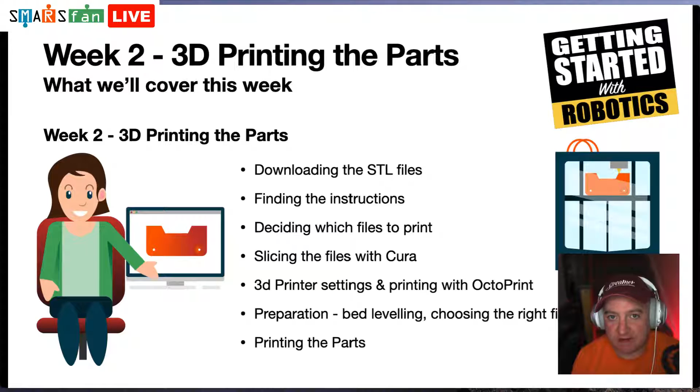So this week, as I said, we're looking at building, printing out the parts. We'll be downloading the STL files, finding the instructions. We'll be deciding which files to print, because there's a couple of different types of robot we can print. We'll be slicing the files with Cura. We'll be 3D printing, looking at 3D printer settings and how to use Octoprint, which is a really great add-on for a 3D printer if you're not already using that. We'll also be looking at preparation, how to level the bed, choosing the right filament colour and so on, and then printing the parts. So, downloading the STL files.

Okay, let's get back to our keynote. So first of all, to download the correct files, there's a couple of different places we can do this for the SMARS robot. So the original place where SMARS was hosted was on Thingiverse.

So if we switch over to Thingiverse, let's get Thingiverse open. And let's have a quick search for SMARS and see how easy it is to find. So we'll literally just type in SMARS, and the first one that comes up is SMARS, a modular robot. That's the one that we're after. So let's click on that and have a see what we have.

So you can see there, that's Kevin Thomas's alter ego on Thingiverse, and you can see there November 22nd. I think we should mark that as a birthday, what do you think? 2017. And there's been quite a few different comments on that, a load of remixes. People have loved this robot because it's so flexible, so adaptable, very easy to build, not very complex shape-wise, or to be able to add things to it. So this is why it's so popular.

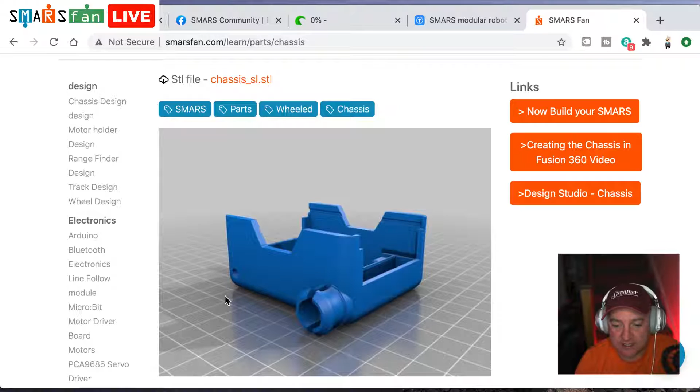We can just go to build instructions, click on the wheeled robot, and see the list of all the different parts that we might need. If you click on the chassis, for example, it'll take you to a page all about the chassis. You can download the file there, chassis SL.stl, and read a little bit about it. You can see in context all the other things that relate to it, some quick links, and a video about how to create this in Fusion 360 if you wanted to expand it. So a great resource there that we put together.

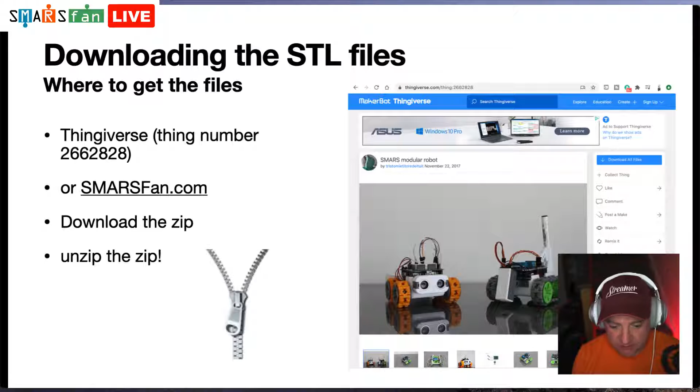There's a couple of different ways that we can get information about the right files. I don't care which you do, as long as you get hold of the STL files, that's the important thing. You might want to go to the source, go to Thingiverse and get them there, or you might want to look at SMARSFan. Whichever you want, download the files, unzip them, and that's the first part done. So then the build instructions.

Okay, so build instructions. As you saw a couple of seconds ago on the SMARSFan website, I put together some quite detailed build instructions step by step. We just go back to the home page again, click on Learn, click on Build Instructions, and then click the Wheeled Robot button. There is instructions for the quad robot as well if you wanted to do that, but today, in this series, we're going to be looking at the Wheeled Robot.

So you can see there we've got some step-by-step instructions. There's a little navigation bar on the right hand side, and some nice pictures on the left with instructions about what we need to do. We can click through them one thing at a time, and see all the information that we need to get started with that. You can see the robot being built up there with all the different parts. So that's, I would say, the most authoritative place to get the information from.

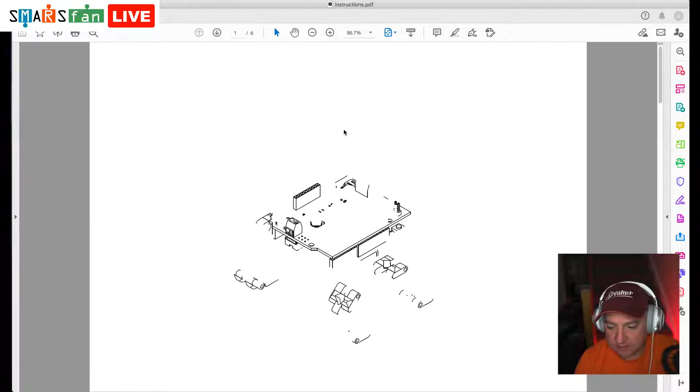There are some files in the files folder when you downloaded them earlier. So let's have a look on here. There's some PDF files, so there's an instructions PDF. We open up that, let's have a look there. There's some instructions, it's a bit like an IKEA kind of instruction manual about how to assemble this. You can see there, it's very simple to put together.

One of the things that people get confused with is this step number 10 that you can see here. They ask, where'd you get that pin from? I didn't see an STL file for that little pin. All that pin is, I'll just come back to the main screen, I've got some filament here from my 3D printer. It's literally just taking that filament, snipping that off and putting that through the track. That's all that is, so it's not that you're missing a part. Okay, let's get back over to Keynote.

So that's our instructions. Let me just bring up that on the screen there so I can see what I'm doing. I'm managing lots of different screens here at the moment. So build instructions is one place that you can go, and you can also look at the PDF file that's part of the downloads.

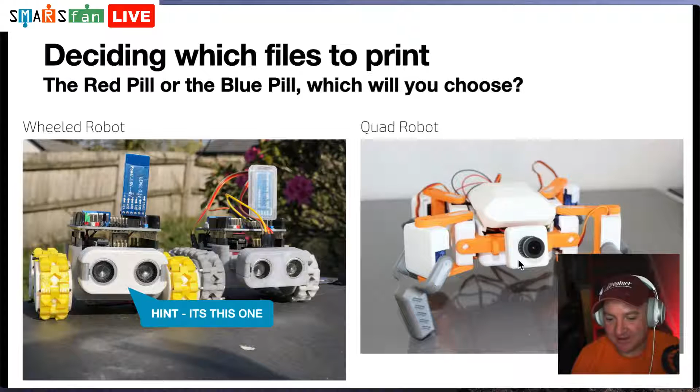So, deciding which to print. Are you going to go for the quad, which is a bit more of a complicated build? I've got one on my desk here. Or are you going to go for the standard wheeled one? This video series is really about the wheeled SMARS, so that's why I've said it's this one. That's really what we need to go with. So let's choose that one, shall we, together?

Now, slicing with Cura. Okay, so Cura is the software, certainly that I've chosen to use to slice the files.

There is other software available. There's Slic3r, there is Simplify 3D, which I also purchased as well. That's commercial software, about £100, I think, to purchase for a perpetual license. I believe they announced this week that they're working on version 5. The announcement seemed to be all about infrastructure though, so I'm not sure what new features it brings. Really, that's what people are interested in, not really the background stuff. I believe it's like a mother and son who run the company as well, so it's very good software.

It's very advanced structures, which we'll get onto shortly, about how it can help support you when you're building your model, the different internal structures that could be temporarily printed to stop the print collapsing in on itself. But Cura is free. It's provided by Ultimaker, one of the largest 3D printer manufacturers, and they provide the software for free. It's completely open source, very easy to get started with, but also very flexible. There's a whole load of features you can get into and make some very interesting prints, so we'll talk about that a bit further on.

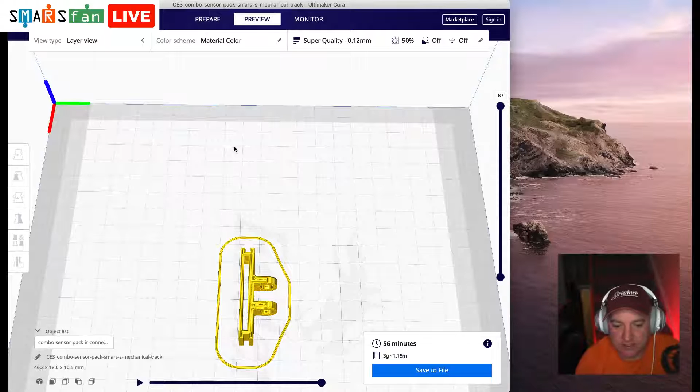So I've got Cura loaded here, and you can see at the top here, there's 3 different buttons: prepare, preview, and monitor. Now, I don't use the monitor myself. That's for connecting to your 3D printer and monitoring the progress, where it's up to. I use Octoprint for that, and we will come to that momentarily.

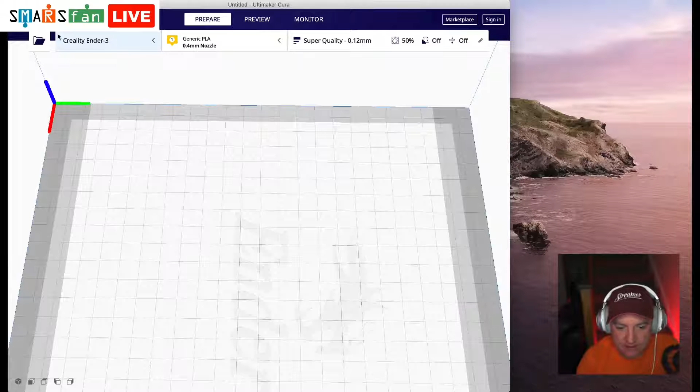So preparing, let me just get rid of this part that's on the bed. Let's open up some of them STL files that we downloaded earlier. So you can see here, these are the files that we downloaded.

So there's an ultrasonic. If you press space on a Mac, you can actually get a bit of a preview of what that file looks like. So that's... where's it gone? That's this part here, which is the ultrasonic holder.

So let's say we want to print that part. So I'm going to open up that one. That's going to load it onto the bed.

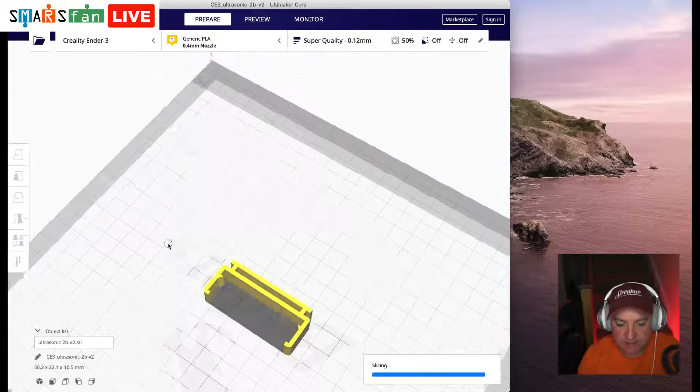So this thing I can see in front of me here, I can move it around, is a sort of virtual 3D printer. So you can see there, that's what it looks like. And right in the middle of the bed is our part. And we can see on the left-hand side there, it says object list.

So you can see on the right-hand side, it's given us an estimate. Based on the current settings, this will take 58 minutes to print. It'll use 4 grams worth of filament, and we're on super quality, so the layers are 0.12 millimeters in height. That's pretty dialed in, that's pretty extreme.

So if we go to the quality settings and change that to low quality, let's keep our changes there and see what happens now. On the lowest quality, it can do it in 26 minutes, so it's half the time, but the quality will be significantly different.

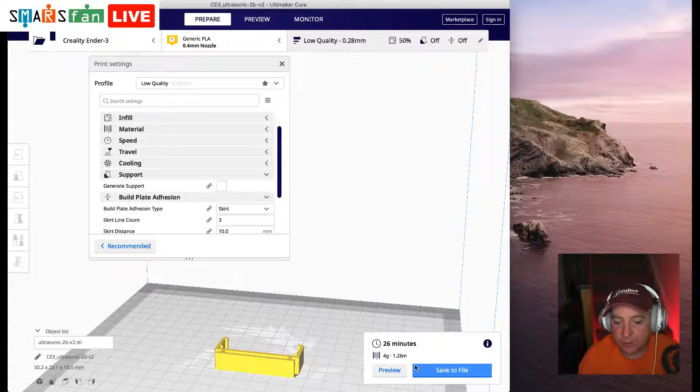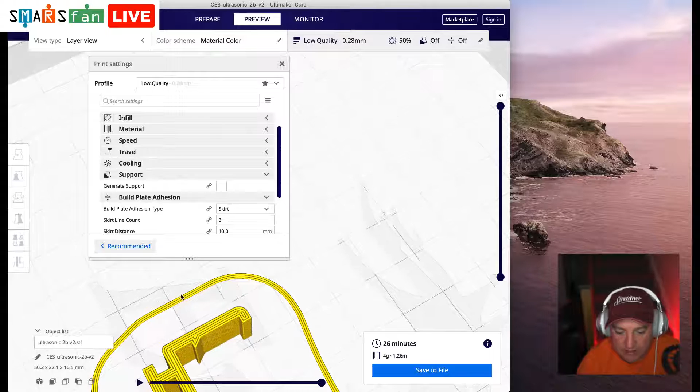So if we go to the preview button here and have a quick look, I just try and get a good view on this, it's not the best to be able to navigate. You can see there, these lines, these are the actual paths of the filament as it will be laid down. So it will do this outline, it calls that a skirt, and we'll come to support and build adhesion in a moment.

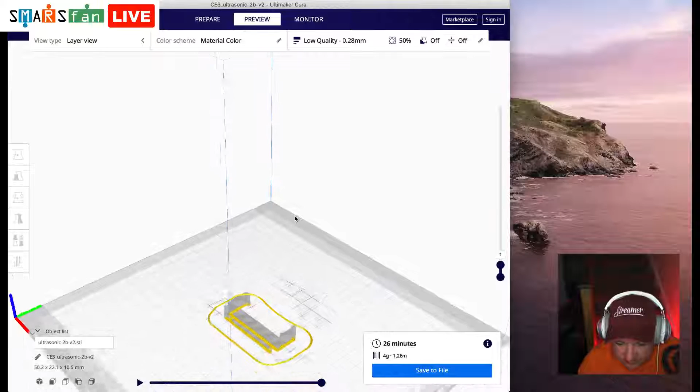So you can see that, and if we move this here, this is the sort of layers themselves. So if we go down to the very first layer, this is what the 3D printer will do. If I just get rid of that for a second and try and zoom out, let's see if I can get it to do this. So there we go, what we can do is we can pretend to be the printer, and you can see the head there moving around.

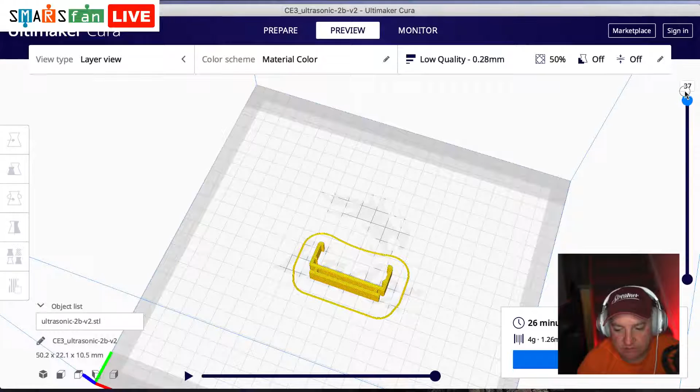If I move this like this, it might be a better view of the screen. So let's see if I can get this displayed a bit better. So this playhead here, this thing is the 3D printer's nozzle, and we can see it's going to draw this path out around. It'll do it 3 times, and then it'll start to go to the middle, start to draw out a bit at a time, and it'll do that for each of the layers. So we can see here, if we build up the layers, there is 37 layers in total.

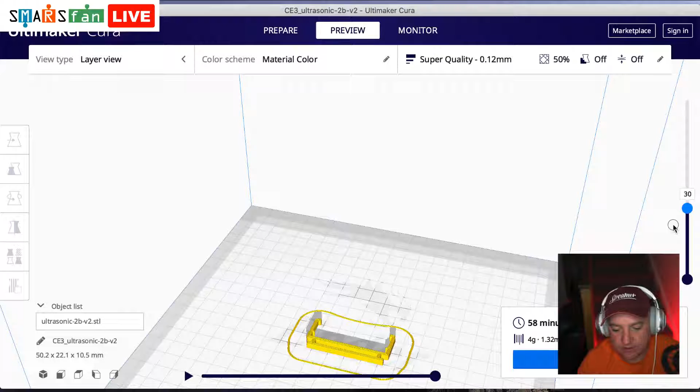If we change that quality though to be super quality instead, let's keep that change there again. It's now doing its slicing, and we can look now to see how many layers there are. So 37 before, there's now almost treble the number of layers, 87 layers now. So they're much more refined, and that means the quality of the print will be so much better. The curves will be rounder, the walls will seem smoother, all round it'll just be a better quality print, but it does take a lot longer to do that.

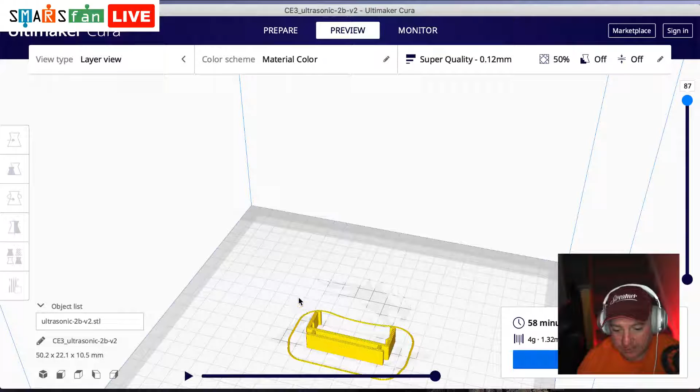So that is how we load objects in there. So if we were to load another object, if we come back to the prepare screen and click on that little folder again to drag in some extra ones. So say we want to do it at the same time as that, the motor holders. Let's try, yeah, the holding board 9 volt, they come as a pair there. So it's just stuck it there.

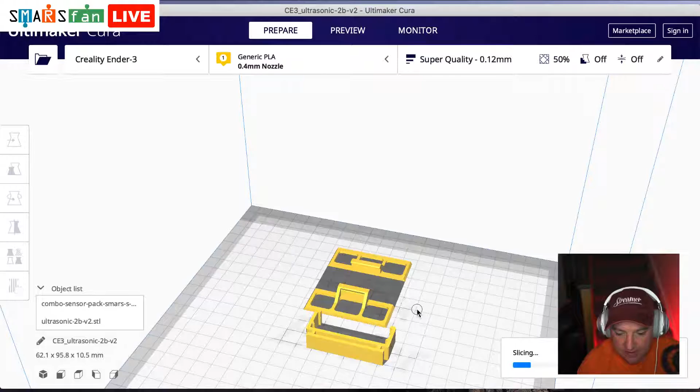I'm not too happy with that. You can click on the actual part and sort of move it about a bit, so we can do that. We can move them across as well, let's just do that, grab that green thing. I like them to be as close to the middle of the bed as possible, but I don't want them to be too close together, just so that they're not touching. There we go, so it's going to redo its calculation to see how long it will take to print.

And it thinks now it's 1 hour and 57 minutes, so you can see our print time is increasing. Now I don't know where you have your 3D printer, if you do actually have a 3D printer, but I have mine in my living room, so I have to try and keep my prints down to a minimum time as possible, rather than have really long prints.

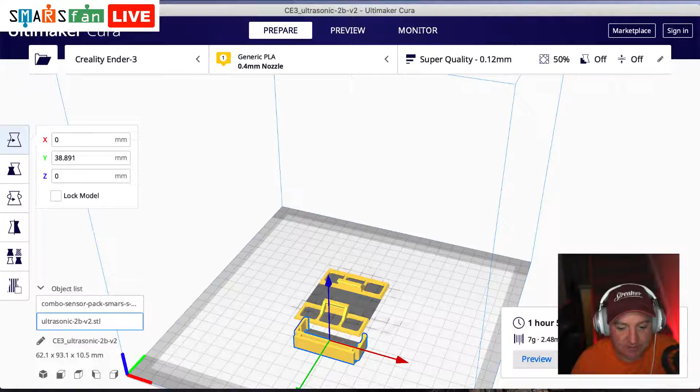So the chassis, that was an 8-hour one. I had to get up early to start that one off, so that in the evening it wasn't still carrying on printing, because it makes a bit of a sound. I have ordered some quieter fans, and they're coming in the post this week, but we'll switch on the printer in a minute, it's just next to me, and we can see if you can hear it actually on the microphone. Anyway, so that's on the prepare.

Now what's interesting on this one, if we zoom into these little pieces here, oops, they have an overhang. Just trying to get it into view, I'm not sure how to make it rise up.

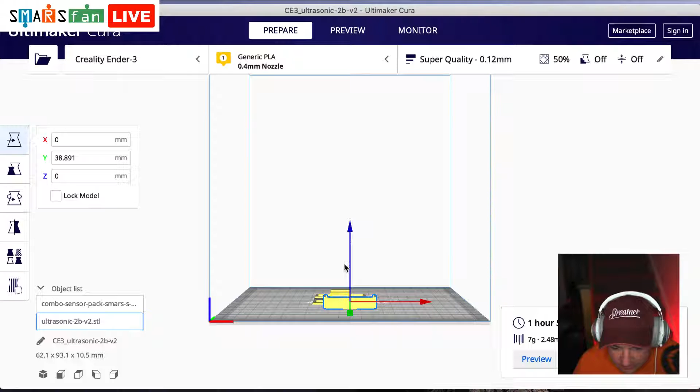If I do, there we go, that might be a better view. So if you look there, these parts overhang slightly. So when I go to preview, if I've selected support structures, then it will actually put something underneath that to stop it from falling in on itself if it's within a certain tolerance.

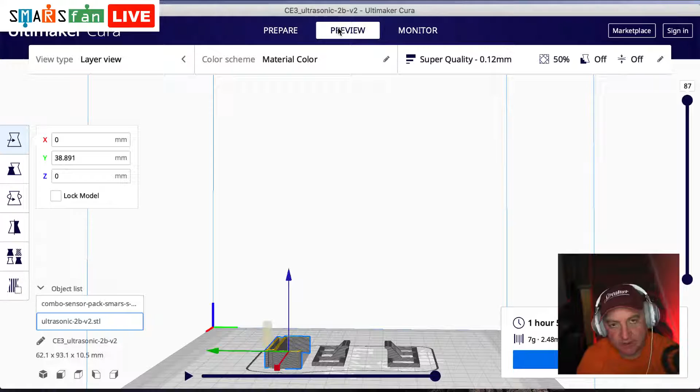Now they have been designed to be 45 degrees or less, the curvature. So as the printer's building up, it can actually step out a little bit, a bit like dominoes. It can sort of just overlap them ever so slightly. And as long as that angle is 45, 50 degrees, something like that, it's fine, it won't collapse in on itself. But if you try and print just into thin air, obviously the printer can't do that. The filament will just loop, it'll just sag down. So you need some kind of support structure underneath, and you need to print that from the bed.

So there's a setting in here which is called support, and you can do lots of different types of support. So we actually didn't have that switched on. If I switch that on, let's see what happens now. See if that actually does put some support in there. It might decide that it is going to do that.

And there are different options for support. So I like the tree option. Rather than just creating like this has done now, just like a straight up and down structure, you can create one which is almost like a tree. It has like a main trunk and little branches that come out. So one of the compromises with doing structures is you don't want them to adhere to the bed, to the structure itself.

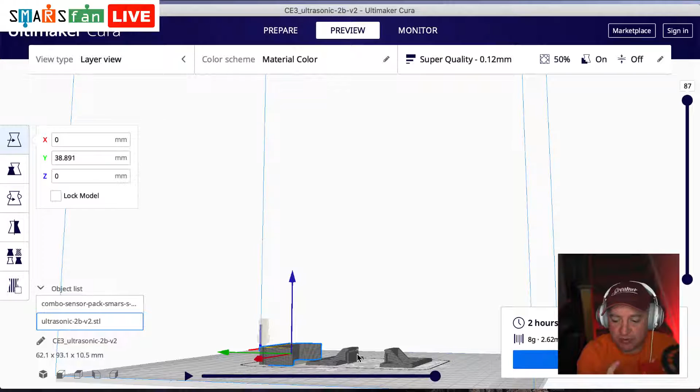You don't want the structure to adhere to the print itself. So when I printed out this one, and we'll have a look in a moment at, my lighting's just changed. Let me just change that back. Yes, when you print out something like this chassis, and I've got a video of that later on that we can see, there are some things in there that required support structures.

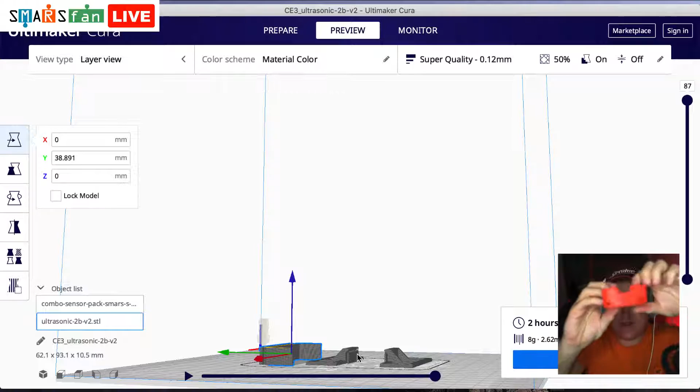So, for example, that circle there, the angle in there requires a bit of structure, and also underneath on the bottom, in fact, there is still some support structure fastened on there, and that's one of the things we have to watch out for, and why I prefer the tree one, because the tree can have a much bigger trunk structure, but then little branches to hold up the bit, and when the thing comes across the very top, it's hardly touching it. It means you can remove it a lot easier, and that's what it comes down to.

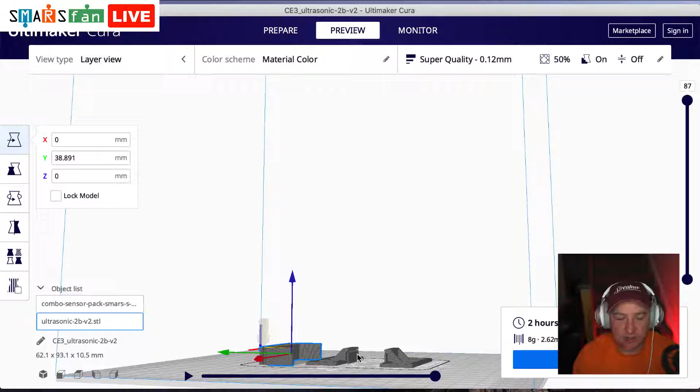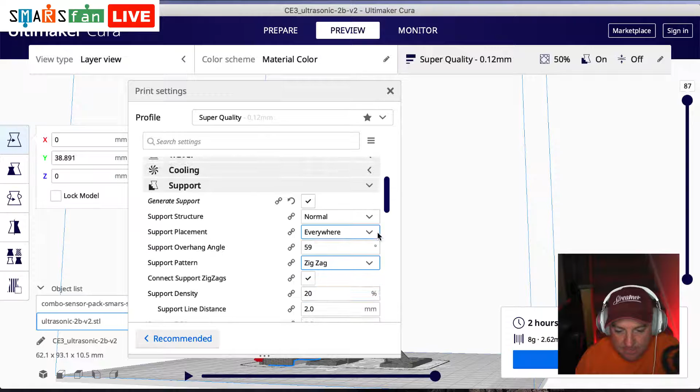You don't want to waste a lot of time printing out support structures, but you do need them occasionally. So Cura will help you with that. All we need to do is just switch them on by ticking that box there to say build support structures, and we can say what type of support structure we want. So I prefer the tree ones, which I think is an option in there somewhere. Yeah, you can say tree or normal.

So if we do that, we have a look on here again. We might see that it looks a bit different than just them straight up structures that it had before. Just taking its time to do that one. That's obviously a bit more complicated of a task. Yep, there we go. So you can see they're more of an angle now. They start out with a main sort of trunk, and there's lots of little pieces that come out there.

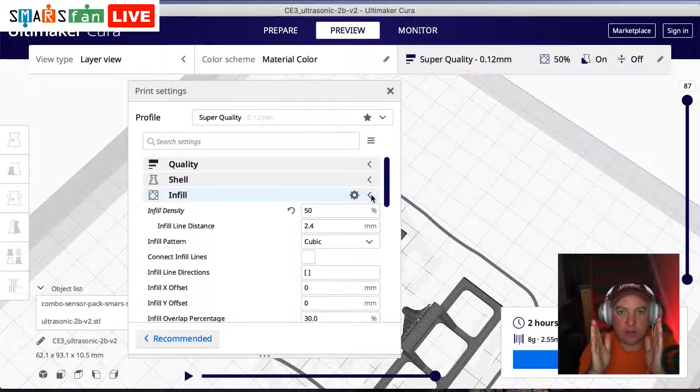So that's support structures. Let's have a quick look else we've got in here as well. So infill. When we create our 3D model in something like Fusion, really all we're defining is the outside walls, the surfaces that are the outside structure. So even something like this, it has walls. It has like a face there and a face there, and what's in between those two things isn't necessarily solid.

Now you might assume that these things are solid inside, but that would take a long time to print because every single layer would have to be a full infill, as they call it. It would have to have a full infill of material. So, and it would also be heavier.

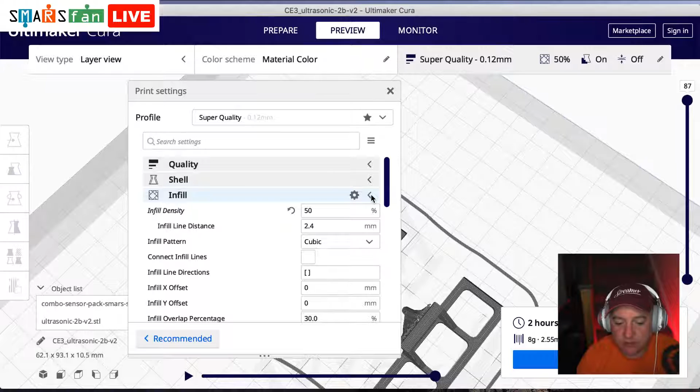So what we can do is we can create an infill pattern, and there are lots of different patterns to choose from. So we can have a simple grid, we can have lines, triangles, tri-hexagons, cubes, all kinds of complicated gyroids and things. And they're quite interesting when you watch it print. So if we go back to here, and we dial this down a little bit, we might actually be able to see some of the internal.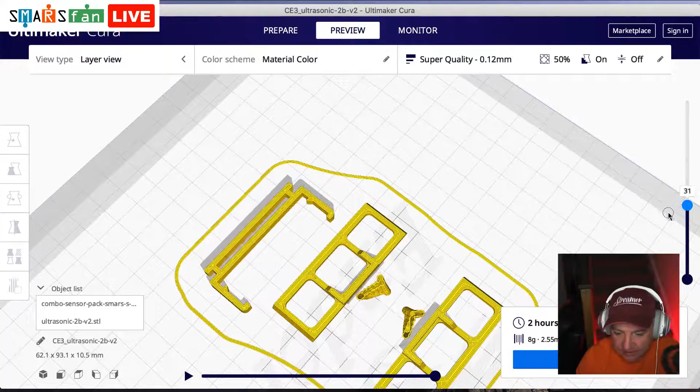Just about there we can see this has got a little funny pattern to it, and that's because it's got an infill, so the middle of this structure isn't solid. The rest of it is because it's so small, it's too small to actually have an infill, so it's just solid, it's just walls. So the outside edges are considered to be walls, and they get special treatment. You want your walls to be structurally sound, so they get a couple of layers there.

So that's infill. Then the material itself is the filament that you're printing. Different types of filament have different properties. So if you're using PLA, what's that - polylactic acid, I think it's called. PLA is made from fructose, mainly made from cornstarch, sort of sugar based really.

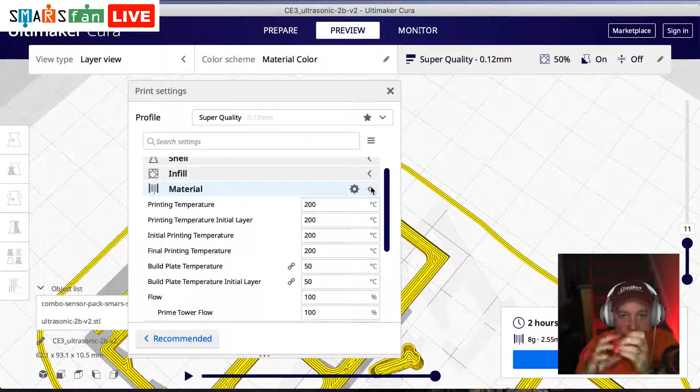So if you threw that into the sea, PLA wouldn't be around in thousands of years time. In probably less than 5 years it would have just turned into food for the fishes, so it's quite biodegradable. That also means if you leave something made of PLA outside in the weather, it does rot, it bubbles and degrades over time and becomes brittle. But it is great for robotics. We don't need it to be, this is reasonably tough - if I drop this on the floor, it won't shatter.

And that can be what temperature you print it at, on the build quality in structure. The infills and just the general structure of the thing - all those things can contribute to the rigidity of the PLA. So it's quite a rigid structure.

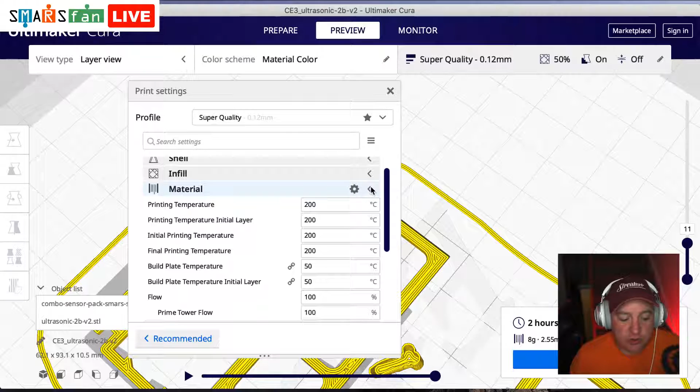You can also get things like TPU - I don't know what that stands for off the top of my head, but that's a rubber type plastic, and you find that on things like phone cases. It almost feels like silicone. It's quite bendy, stretchy, and we can use that for things like tires, or anything where we need it to be able to bend and retain a shape. So TPU is great fun to play with.

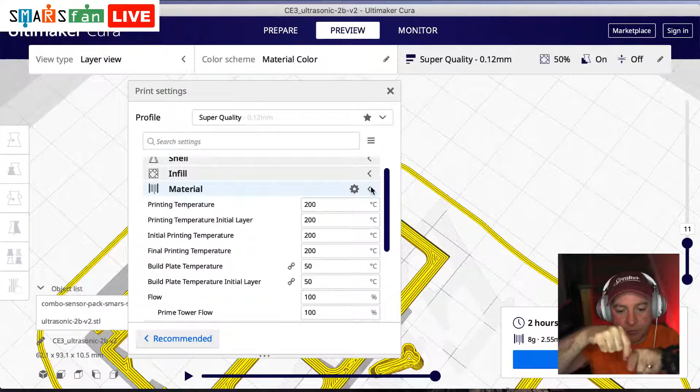But on my 3D printer, which we'll look at in a moment, my printer has a Bowden tube. Where the filament goes in, there's a little motor with a little wheel that pushes it out, and then it goes into a tube that goes all the way down into the hot end where it melts it and squirts it onto the bed. That Bowden tube is a bit of a problem when it comes to TPU, because you need to be able to force it through, and TPU is bendy and flexible by its nature, so it doesn't do very well on printers with Bowden tubes.

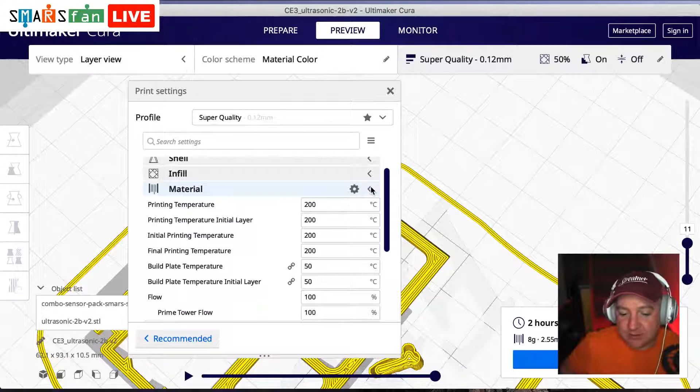So if you've got something they call a direct drive, where the extruder motor is actually sat on the hot end itself, they're best for TPU. I've not done any TPU myself, though I do have some, in fact just under my desk here - it's a very small reel, I've not opened it yet. I will have a play with that at some point, because I intend to use some tyres to give it some extra grip.

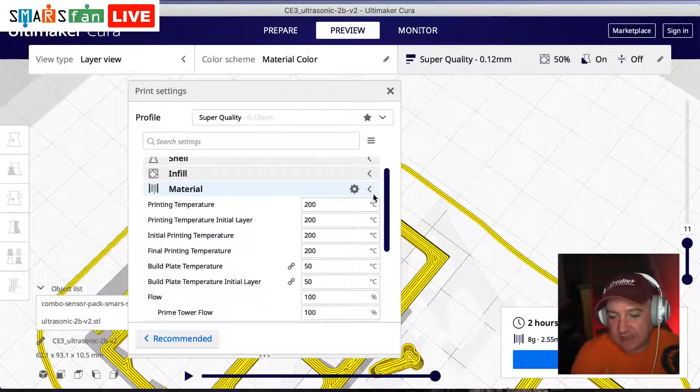So that's the different properties - what's the melting point? So around 200 degrees for PLA, you can probably go 10 degrees less or higher depending what you want. And if you find when you're printing you get very stringy prints, or prints where the layers are not adhering together, that's probably to do with the temperature it's being printed at. And then we have other things like speed and travel.

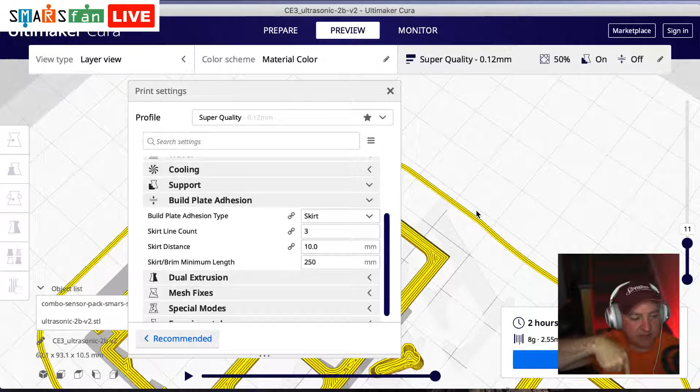I don't tend to deal with them too much, but the build plate adhesion I do look at. So a skirt is like we have here - it's almost like it's wiping the external area of where this print is going to be, just to create...

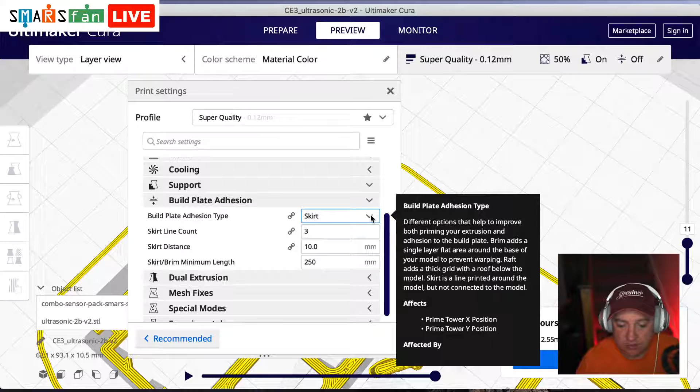What does it describe it as there? Let's have a look what it says for skirt. The idea is that it doesn't connect to the actual model itself, but it gives you an outline of where the model is going to be, and you could probably stop it if it wasn't adhering to the bed at that point, so you've not wasted any - you've not got into your model proper at that point. You can also have a brim - if we do a brim, and just watch that update in the background, that actually does connect to the edge.

It's like a brim of a hat, this bit that sticks out. The idea is if you have something that hasn't got much surface area to stick to the build plate, like a very tall tube, it might wobble when you're printing it. So you want something that adheres to the bed more, and a brim will help you do that. You can see on the screen this wide flat area helps you adhere to the bed.

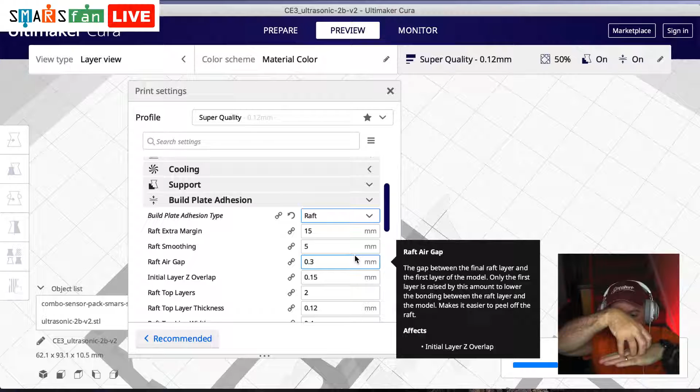We can have a raft. A raft, as it suggests, prints out something and then does the model on top. So if you've got an imperfect print surface and want to paper over that, you can do that with a raft.

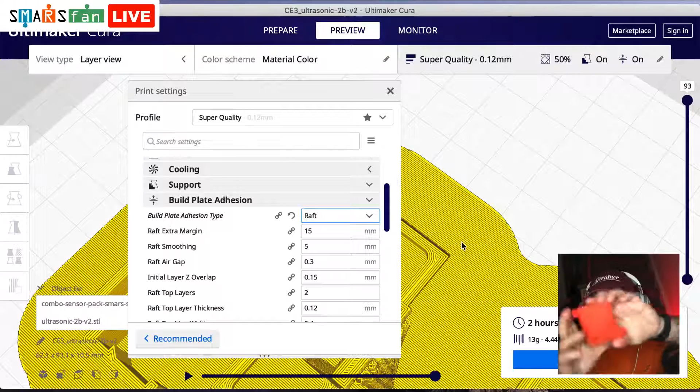I find they can be a bit funny, they can give a worse surface to the bottom of the print. When I print on my bed, it's pretty flat, no real imperfections, can't really see that, can you? But it's quite a good surface, very smooth, because I'm printing on a surface designed to be 3D printed on.

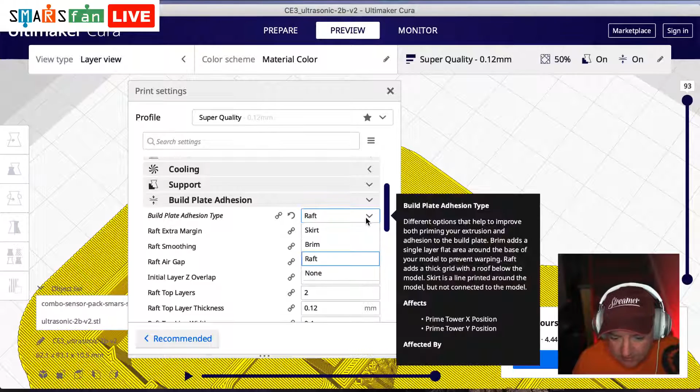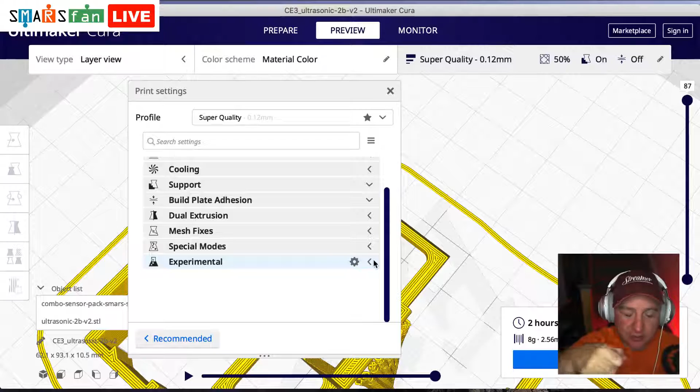So I'm just going to set that back to skirt. What else do we have there? Lots of other options as well, experimental ones. One I found quite interesting is it can actually iron the top. Instead of extruding anything out, the hot end heats up and wherever the very top surface is, it goes along and just touches it. It's like ironing clothes, gets rid of all the wrinkles and imperfections, and you end up with a mirror surface on top. It does add a bit of time to the print, but that's one of the experimental options.

I think that's everything covered from a settings point of view. My settings tend to be 200 or 210 degrees depending on the PLA, and between 50 and 70 degrees for the heated bed. If you want the print to stick to it well, heating that bed up will help it adhere. But don't leave it too hot because it will start to melt away, and you'll see a melting effect on the very edges. You can also make it so that further up it lowers the temperature.

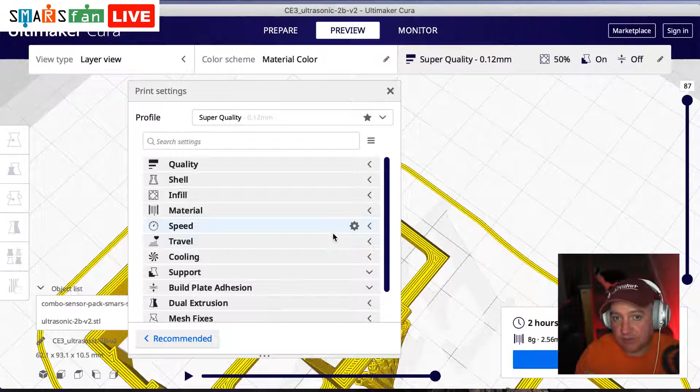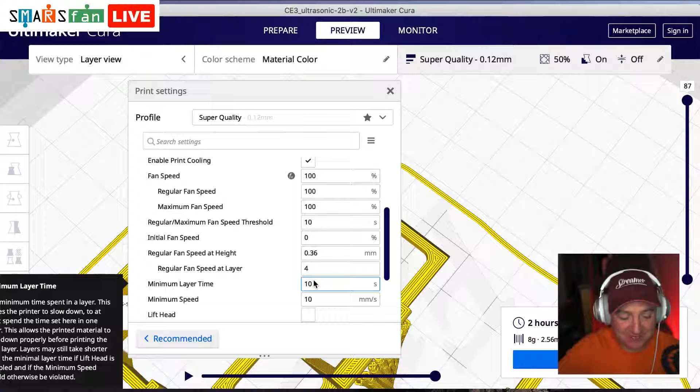They sometimes have in the cooling sections settings for what height you want these things to change at. It's similar with the fan. There's a fan that blows the hot end cool, because you want it to melt the second it comes out of the print head, then you want it to cool down. So there's two fans, one to cool the part and one to cool the actual hot end itself so it can maintain temperature. Each of them tends to have two heads, two fans.

That's really it, the two main settings I have. I go with all the default options Cura provides, and it can come out with some very good prints. It can also come out with some very bad prints if you don't calibrate your printer properly, so we shall have a look at that shortly.

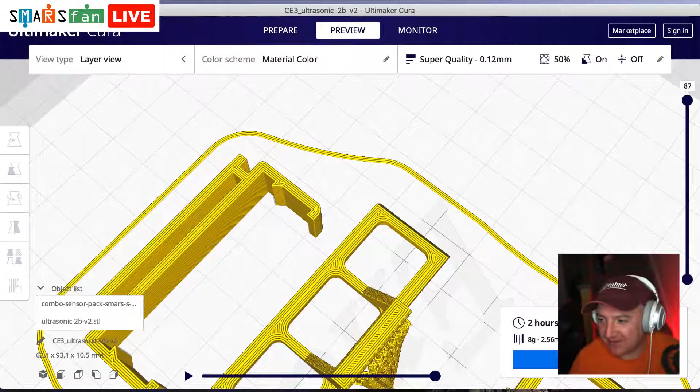So let's get back to Keynote, that was slicing with Cura. Once we have finished our slicing, we need to save that file somewhere, it will save as a G-code file. G-code is the name of the instructions for the 3D printer. You can actually read these files, they're in English, but they're just a code, a number, and we can have a play with that in a minute when we switch the printer on.

So if I save that onto the desktop and call this live stream G-code test, let's save that. So that's now saved to my desktop.

We can open that up and have a look at that file in something like TextEdit, let's see if it'll let me do that. Let's just find TextEdit, there we go. There'll be a lot of instructions, don't get me wrong, but you can read it. All these different codes tell the printer what to do, and there's some comments as well. It just tells it that's a home, that's resetting the extruder, that it was generated with Cura, blah blah blah. So there we go.

So let's get back to Keynote. So, 3D printers and Octoprint.

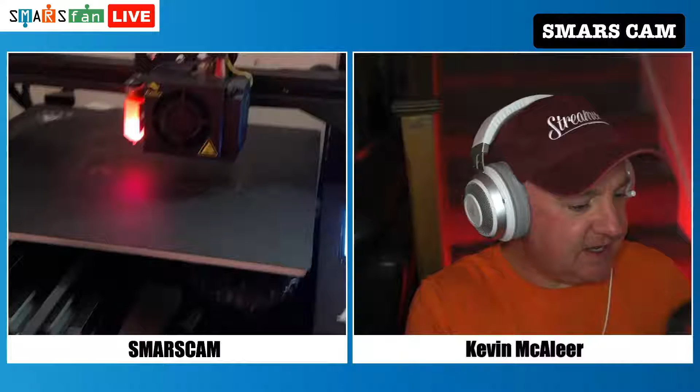Now if I switch over to my split screen for a second, let's see if we can see that. You can see there I've got my 3D printer just coming into life. I'll just try and get a bit further back.

So you can just see there's a bit of a coloured display just down here, and you can see that red glowing thing is the sensor, for detecting where the bed is. It's the bed leveling BL Touch.

So if I go into Octoprint and I just click connect, I'll show you what Octoprint is in a second. If I just go to my screen share, you can see here this is Octoprint. It's just connecting to the printer.

So let me tell you what Octoprint is. Let's go to Octoprint, Google search, let's open it up. Octoprint is software for a Raspberry Pi. It's kind of a pre-built Raspberry Pi SD card image, and you can load that up into your Raspberry Pi, and then you get this interface, this software called Octoprint. This is what it looks like.

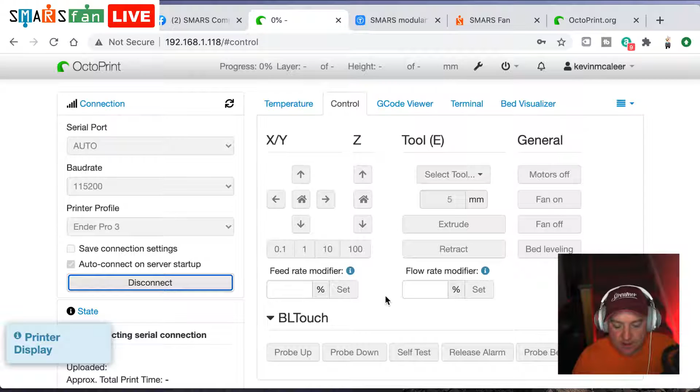I've not actually got it plugged into my printer, so there we go, we need to just do that. Now try connect, it should be okay. And yeah, it gives you a web interface so that you can control your 3D printer.

So I can see now it's just plugging in, it's just firing up, and we can just see now the printer. If I go back to the split screen, the printer is now moving around.

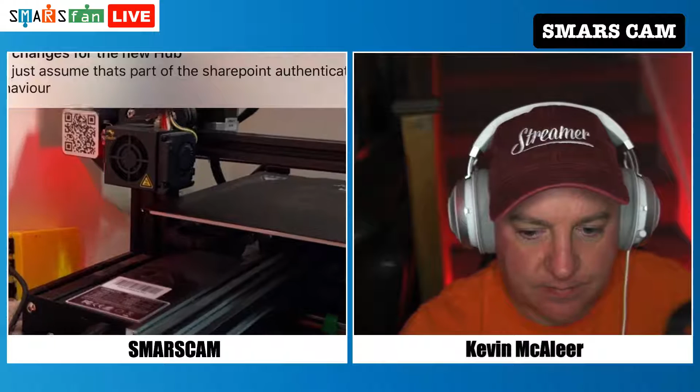There we go. So I can just see some messages coming through because of Facebook. Let me just kill that. There we go.

Okay, so what it's doing now is it's just detecting the level of the bed, where the Z value is 0 on the 3D printer, and it uses that BL Touch device to do that. So if we want to level the bed, this is one of the important things we want to do.

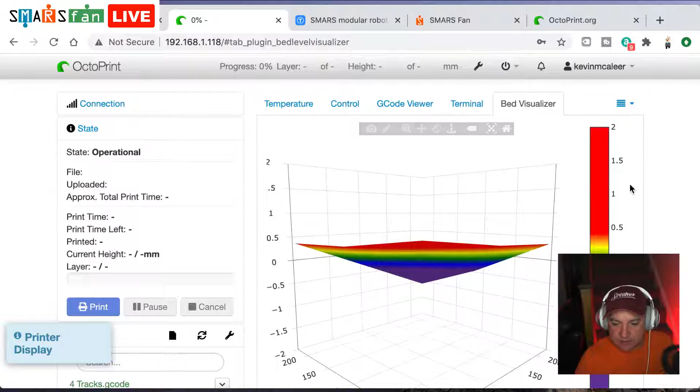I just go back over to my screen there. This is a representation of my 3D print bed. Let us press mesh, update the mesh, and let's go back to our split screen and have a look what's going on there.

So I'm getting some messages on the screen here that I don't think I should be seeing. There we go, so you can see what it's doing now. It's going to take 9 different points of the bed. I think it's Microsoft Teams that's causing that. How do we get rid of that.

So yes, we can see that it's doing 9 different points on the bed. It's going to, you know, imagine like a noughts and crosses board. It's going to do one at each of the intersection points of that.

Not sure why the messages are coming up on that side. It's because it's on my phone, that's why. There we go, so I can do that. It's nearly done, about halfway through now.

Once it's done that, we'll have a representation on screen in Octoprint of what the bed looks like from a height perspective, measuring the height at 9 different spots on the bed.

Okay, so that's finished, we can now home it. So we go back to Octoprint, go to the controls at the top there, and I just click on this home button here. So if I do that and jump back, we can see it's now rehoming to the X and Y position.

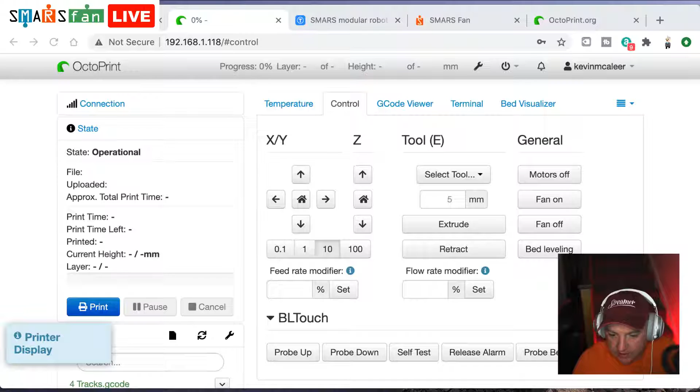If we want to load in that file we created a moment ago, all I need to do is go to my desktop and find that file. So go to desktop, Livestream G-code test, and I literally just drag this across onto Octoprint. We can see at the bottom it's loading it, and now at the top we have the Livestream G-code test loaded there, so I can load that up now.

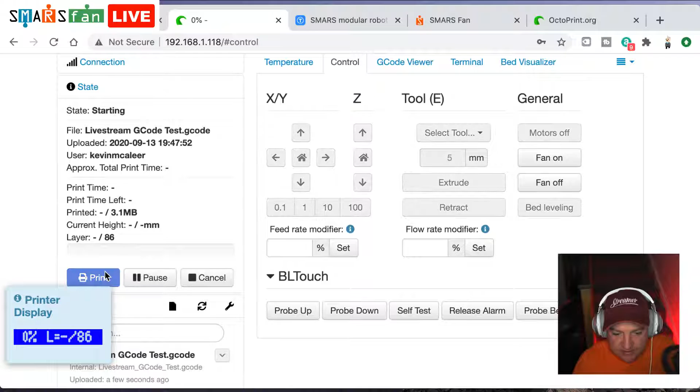It's going to estimate how long it thinks it'll take to print that, and if I press print it'll start to prepare the job. The first thing it needs to do is set the temperature. So you can see the bed temperature is going to be 50 degrees, which will take a while to reach, and the tool will be set to about 200.

So we can just see on the 3D printer there, it's waiting to do something. It's going to wait until, if I can show you what it says there, it says bed heating - that's the little display on the end. You can see all the wires I've got next to my printer there as well.

So I'm just going to actually cancel that, I don't want it to print anything while we're here. I want to switch it off again because it's quite noisy, so I'm just going to pull the plug on that, and switch it off here as well. There we go.

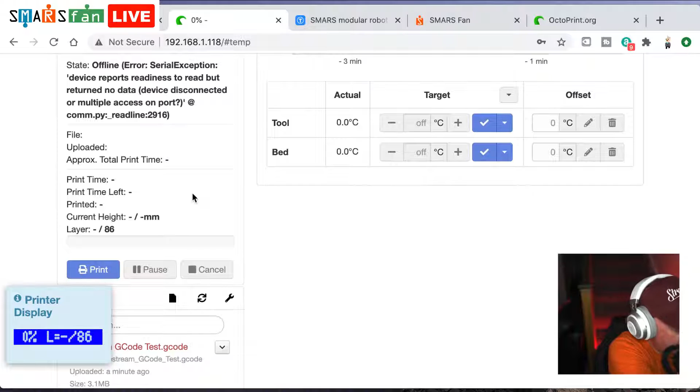Okay, so that's Octoprint, software you can download from octoprint.org, free of charge. It's an image file for your Raspberry Pi, so you do need a Raspberry Pi - Raspberry Pi 2 upwards, I believe, is what they require. It doesn't work on Raspberry Pi 0, they're not quite powerful enough.

So that's Octopi, and I use it because I can walk away, I can switch off my Mac - it's not connected to the Mac at all, this is all through the web. The Raspberry Pi is connected to the printer, and that's the thing monitoring where the print is up to and so on. So let's go over to Keynote and carry on there.

So we talked about temperature, tree supports, quality settings - so now, choosing the colour.

Okay, so what I've created here on the screen, if I go back to my shared screen, is a little PDF file you can download from SmarsFan, which is like a colouring sheet for you to do.

If you want to print your robot in different colours rather than it just being a solid colour, I would encourage you to do it in different colours, because the end result looks so much better. For example, I've gone with a red chassis, a yellow coloured face, the rangefinder cover, the rangefinder holder is white, the wheels are white, and the tracks are black.

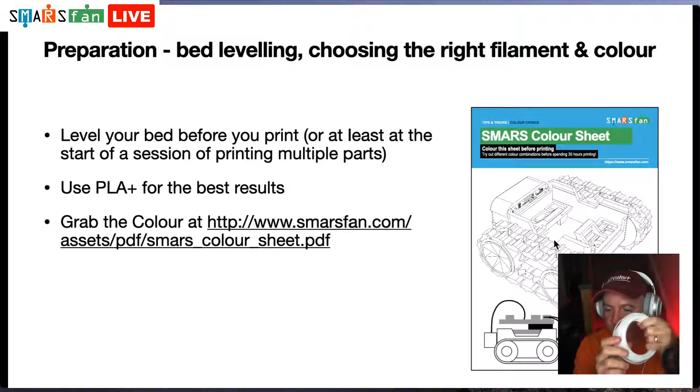I'd also recommend PLA Plus, so you can buy PLA or PLA Plus. PLA Plus is a little bit more expensive, but the quality is better. If you think about the filament itself, let me get this one out of my desk drawer - if you look at the width of this with calipers, it will vary along the length, very small amounts, but these things do make a difference. If it's too varied, if it goes fat and thin along the length, that will mean you'll get blobs and imperfections.

So you want it to be as perfectly true as possible. The melting process going through the hot end doesn't get rid of all the imperfections. So if it's smaller than the nozzle, then it'll get bumps and things. PLA Plus has less variance, but you pay more for that quality and perfection.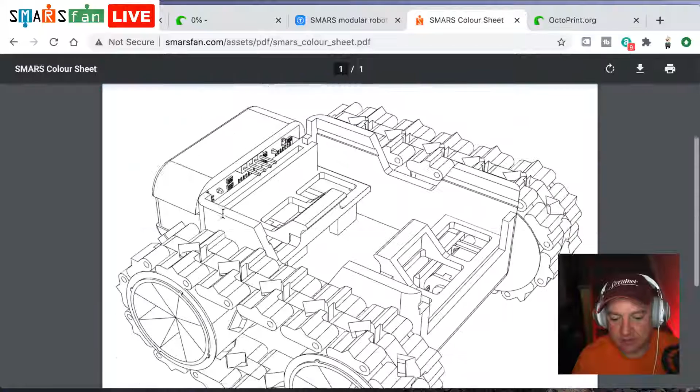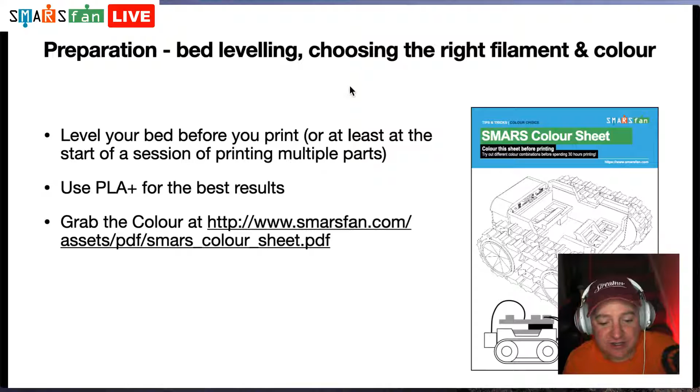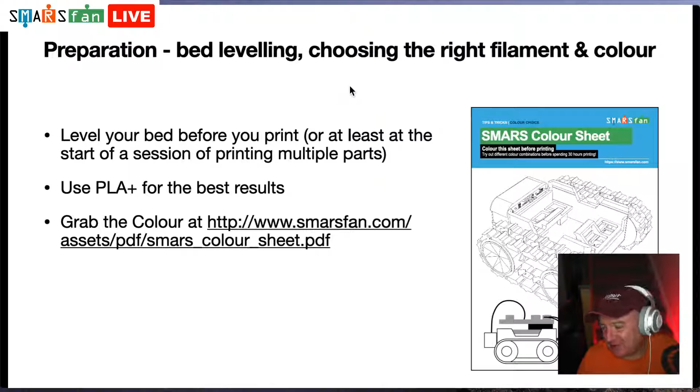The recommendation is to level the bed before you print. You want to do this at least for each print session, I'd say. You don't just want to print without checking if it's level, because you can have some problems with that. Let me show you what happened when I didn't level my bed and hadn't used my printer for a number of weeks and had things resting on it. It was all kinds of bad shape. So we've looked at that from the printing the parts perspective.

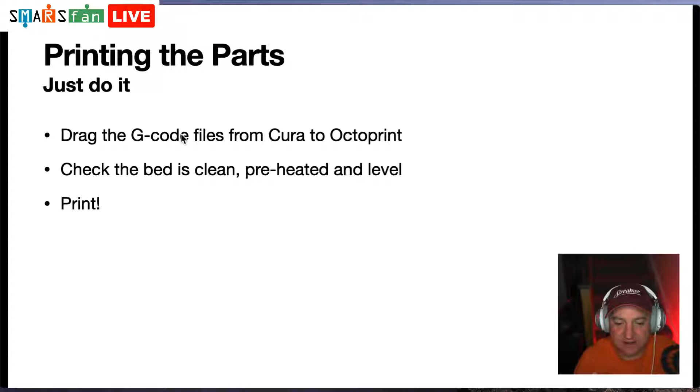We have dragged the file from the desktop to the Octoprint, so the G-code is loaded into Octoprint. We've checked that the bed is clean, it's preheated to the right temperature, both the bed and the hot end, and that it is level. Then all that remains is to print.

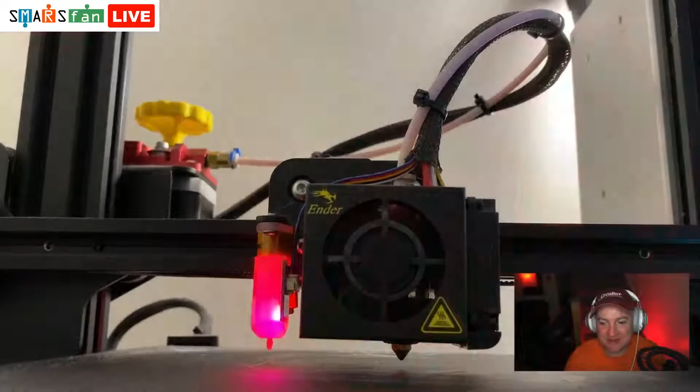So let me show you what happened. This is a print that went terribly wrong. It hadn't adhered to the bed properly, that was the issue. So I had to level the bed, try again, and I still hadn't quite got it dialed in. You can see there it's better, but not perfect, but good enough.

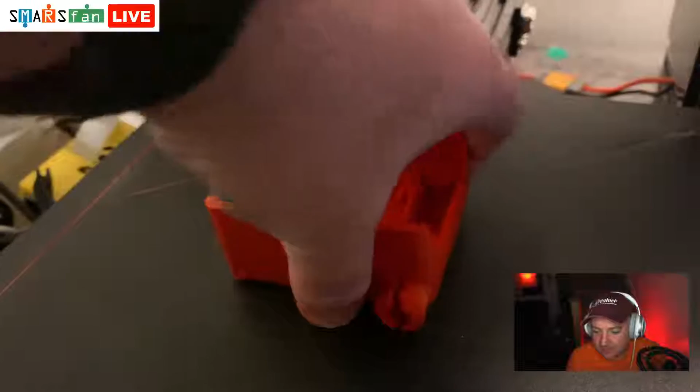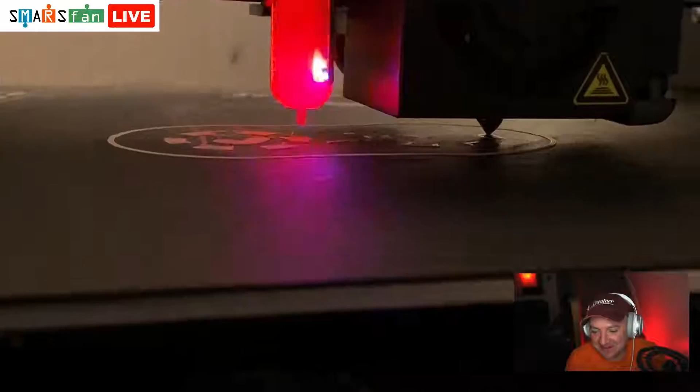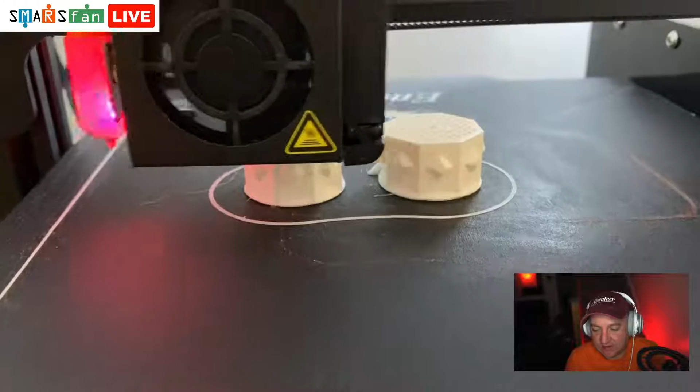This is the wheels, the white wheels. I speeded this bit up because you don't want to watch for hours and hours for 31 hours. So here's not quite a time lapse, but a few selected points in time that I've videoed. You can see the support structures being printed inside there. This is about midway through, near the end, and then they are finished.

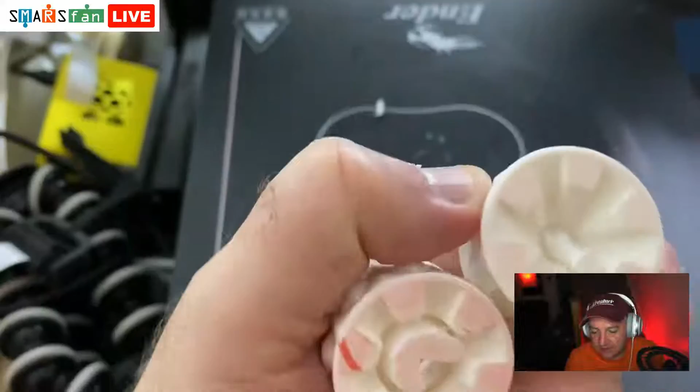You can just see the support structure inside there. As I pop them off and turn them over, you can see the support structures are in the middle, and they just come out very loose. That's the second set of wheels, so they'll all be together.

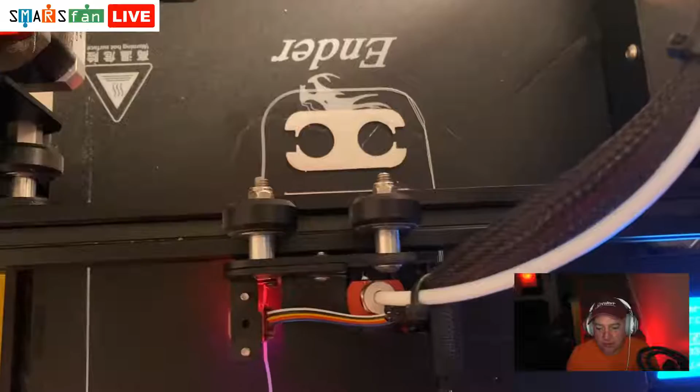This didn't go well, I've got them next to me here actually, I'll show you the difference. They started to warp as they printed, and it really made them unusable as parts. I'll show you them in a second. These are the tracks, I printed them 4 at a time, so I had to do 4 lots of 4... no, 8 lots of 4.

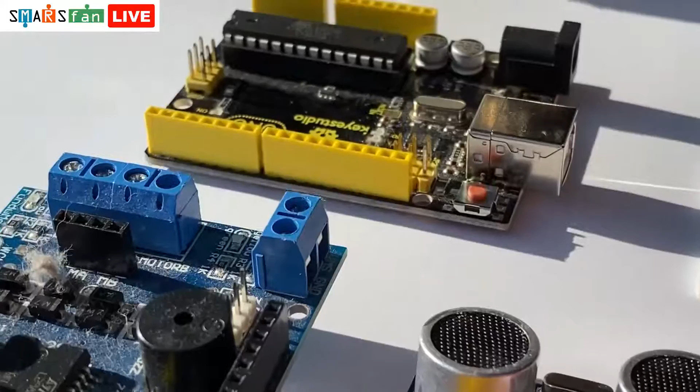Video montage of the finished result. These are all the different parts you need for your Smars. See all the tracks lined up there, all the wheels, the chassis, the battery holder, the motors, the battery connector, the Arduino, the rangefinder and the motor shield.

So there we go, here's some of the failed prints I promised I'd show you at the very beginning of the show. You can see this has warped terribly, it sort of looks rounded, and that's where it's not stuck to the bed properly.

It did seem to recover later on, but it's not really usable. And then these, that's not too bad, but the one next to it has not adhered to the bed either. These things are pressure fit, they're not going to work. And then I don't know where I put the rangefinder cover, but that was just terrible as well. It had all warped, so you couldn't push that piece into it to hold it into place. This yellow one is one I printed previously. So there we go.

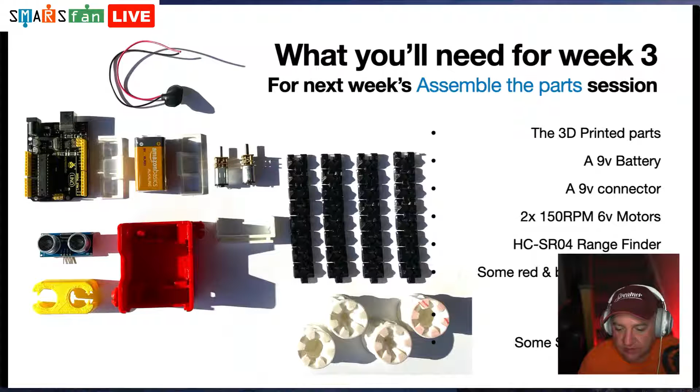So if you're coming along next week and you want to continue the build along, start printing the parts out now, and 30 hours later, thereabouts, you should have all the bits you need to get started with building your robot.